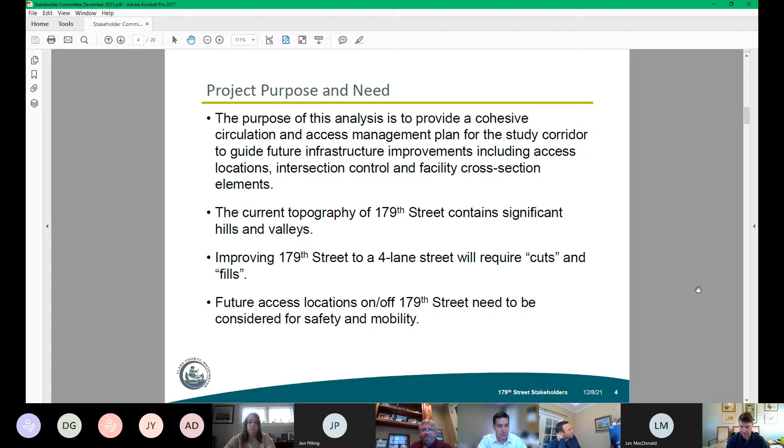So the intent of having a stakeholder committee is really to give us as county staff and consultants guidance, insight, and considerations for promoting that safety and mobility. We also want a team that provides guidance and insight with a lens of what's needed on the infrastructure side of things, both from the public street perspective as well as private development perspective, so that we can all flourish and move forward together.

So we are guided by several different goals and policies within the comprehensive plan. The first and foremost goal is to optimize and preserve the investment in the transportation system. As I mentioned previously, there's approximately $66.5 million of investment going into the Clark County system. That's exclusive from the interchange reconstruction project, which is approximately $50 million coming in from the state in reconstructing the interchange at I-5 and 179th Street. If you do the math, we're looking at approximately $110 million worth of investment, and that's just currently. I'm sure there will be more investment in the street system in the future as we improve this entire corridor from 11th Avenue to 50th Avenue.

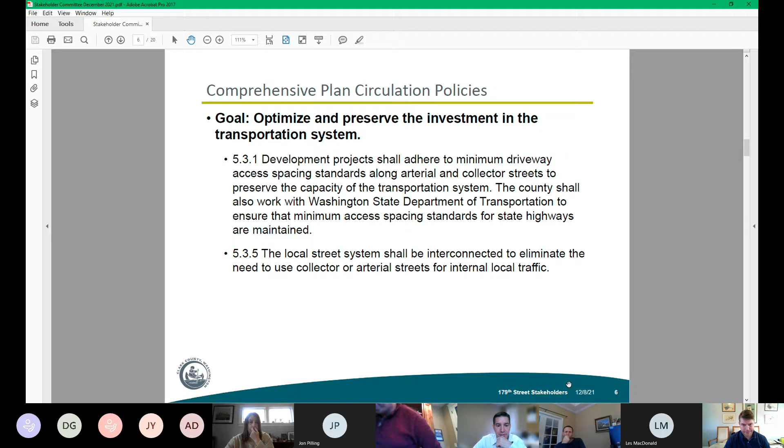We also have a goal in the comprehensive plan to ensure mobility throughout the transportation system. Again, making sure that our investment in our transportation system is as efficient as possible. Not only can we move vehicles and trucks, but we can also move both pedestrians and bikes efficiently as well. We want to make sure that all modes of transportation are accounted for in our long-range transportation plans and within this corridor specifically, so that can accommodate safe travel for all.

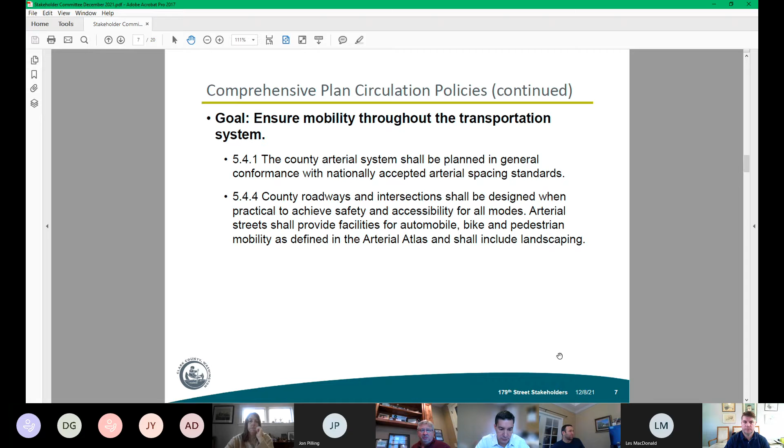So our planning study is the Vancouver urban growth area of the 179th Street corridor. That's on the west end. The bookend is Northwest 11th Avenue, moving eastward across the interchange, and ending at Northeast 50th Avenue.

There are certain corridors or certain sections of the corridor where they interact with the interstate, and those points of intersection are coordinated with WSDOT as both our team and the WSDOT team move forward with the interchange reconstruction design.

I should mention, feel free to interrupt me at any time. I'm looking at my presentation, so if you raise your hands, I can't see you, so just go ahead and speak out if you need clarification.

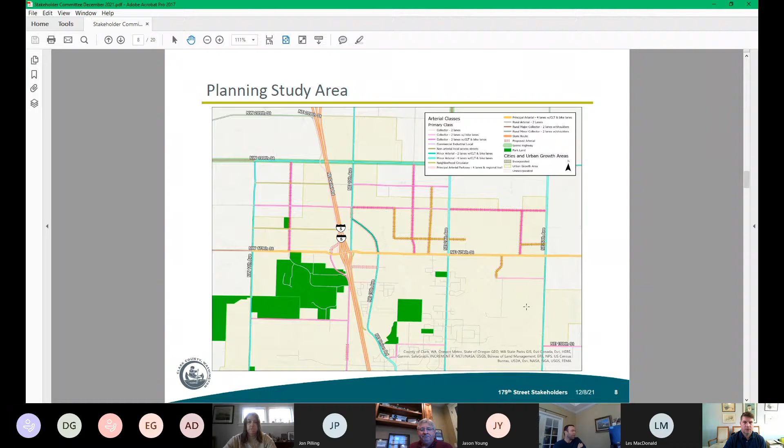So throughout our conversations together, we've largely been focusing in on the interactive project website. This project website, I'll share it here soon.

It has several different layers. We've all kind of worked through this. I hope you've interacted with this independent from the stakeholder committee and have played with it on your own. But there are several different layers added to this map that show both environmental constraints as well as topographic issues. One of the important things that we put in here were regarding the future grade of 179th Street and how that grade interacts with the existing terrain. I'll go into details about that further in the presentation.

Along with future developments that have some line work in here, and both the intersection control type is detailed.

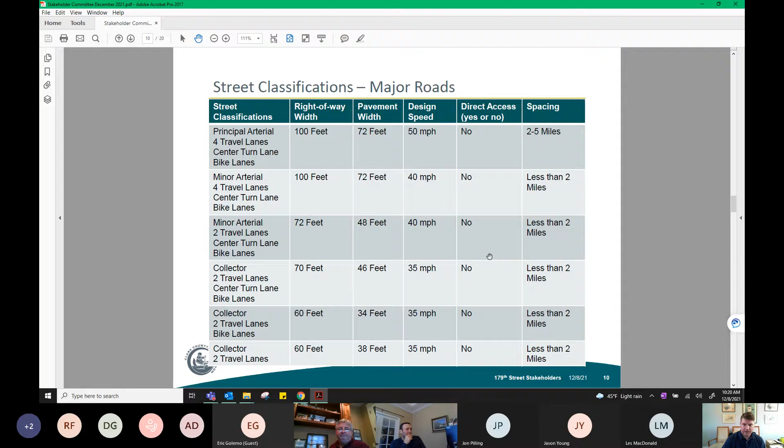However, our local roads serve to connect our arterials and collectors to both storefronts as well as residences and driveways. We have several different types of those. We have commercial industrial roads, 3 or 4 separate types that really serve as local roads inside commercial and industrial zoning districts.

We have neighborhood circulators that are wider than local roads that connect the local roads to the collectors. And then we have local road access. These serve as the street front for many properties and connect folks from their garage or driveway to the larger street network.

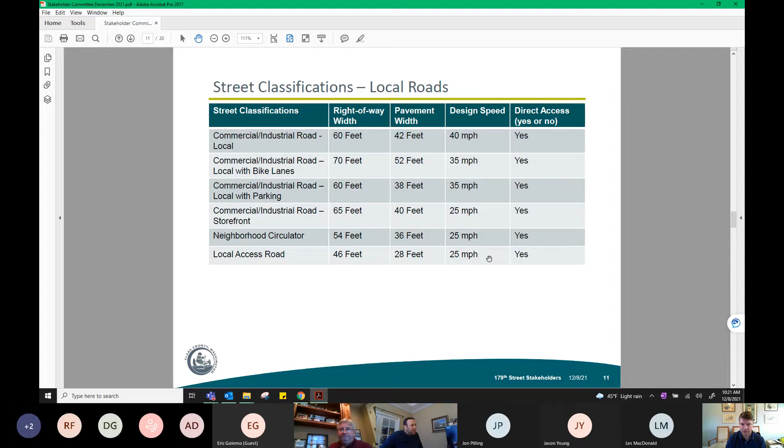Okay, the next series of maps are new maps for you. They expand on our previous discussions regarding the ultimate design and topography of the road with the existing terrain.

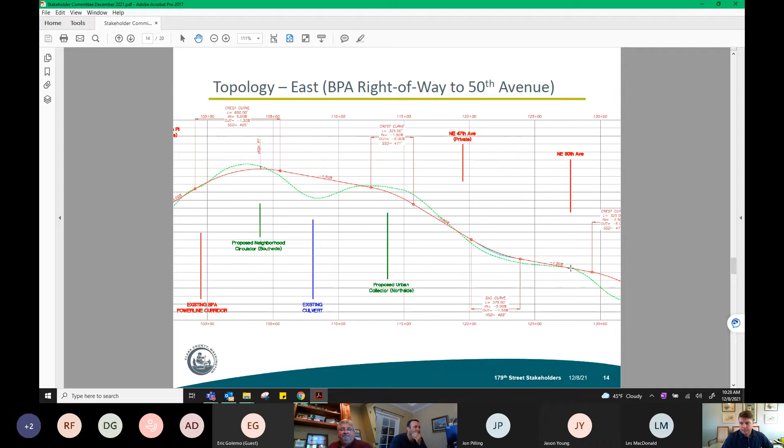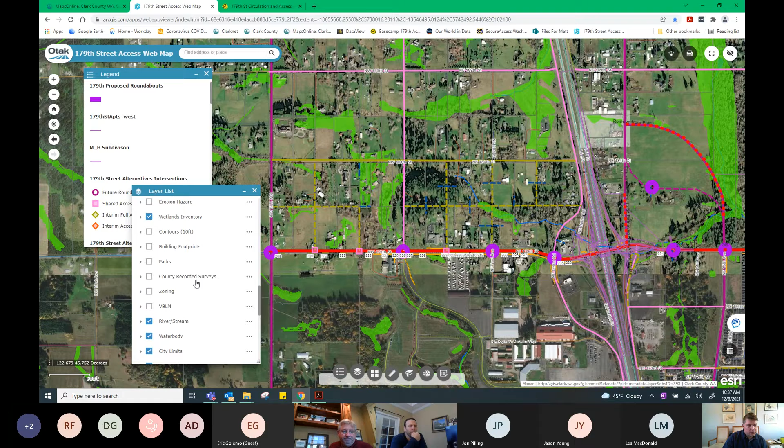So that's the need for the roundabout at that location. And then Delfel Road, as part of the interchange reconstruction, is going to be realigned to go behind the chevron and connect with the existing Delfel Road to the south. That realignment is necessary to separate the traffic at the future ramps, roundabout ramps, and Delfel Road—so it's a safety issue why Delfel Road is being realigned. While it is a county project, it's very closely associated and coordinated with the interchange reconstruction project.

Any questions on this section of Northwest 179th Street before I move forward?

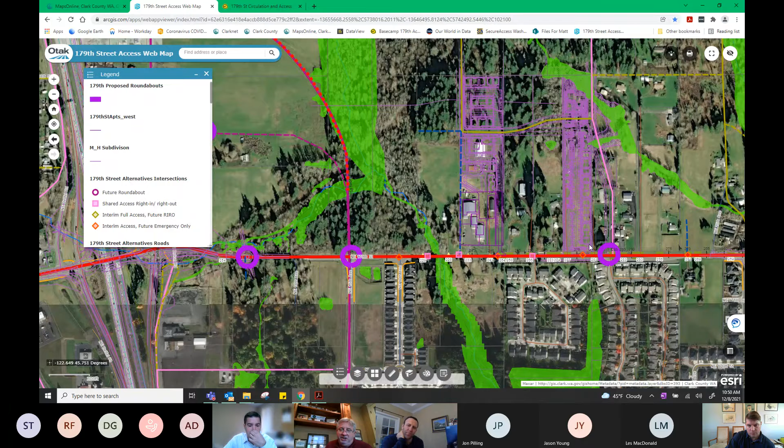Just for the west one, not for the east one. Matt, I think they're correct, because when we went through the site plan approvals, that's what we understood as well. So those would be maintained in their current state—there is no project on 179th at this point, but they'd be maintained with the approved full access until 183rd Street is connected over, and then 22nd Avenue is extended down to 179th. So those would be understood by the development approval to be full access until those other conditions occur.

That's right. It also states that we have to allow full access for the one flag lot and the smaller parcel. So those two lots to the east need to have access through that interim access intersection.

So the difference between the two shades of diamond is one is future emergency only, one is future right in, right out. So does that need to be changed? They are future emergency only. Okay, but one's full access and one's not, or one is, or are they both full access?

It doesn't—the orange one doesn't depict full or half, it just says interim. And that was actually left somewhat ambiguous on purpose, because that's one where we're deferring to the development approval conditions. In both of those cases, I believe the conditions do say full access to 179th until the alternative circulation is provided, and then it becomes emergency access only.

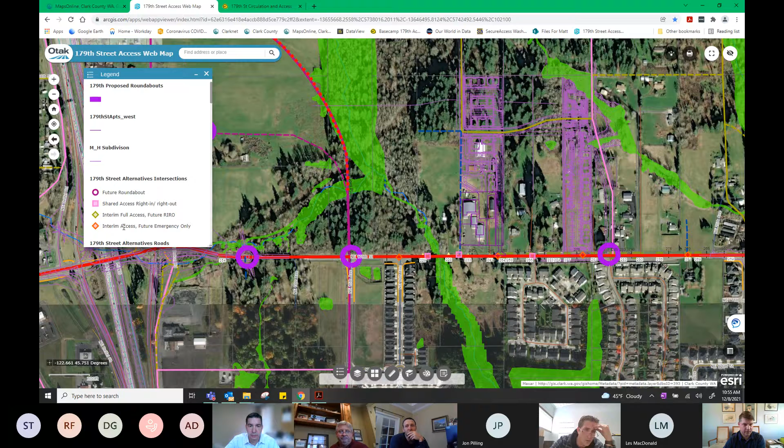So we can add the word full into this. I don't think it will change much—the type can change from interim access to interim full access. Yeah, maybe that one becomes the yellow diamond. But if you change it to the yellow diamond, then the future is right in, right out only, and that's not approved—it's emergency use only. So it's really just adding the word full to that symbol type.

Matt, I might suggest an asterisk. Maybe where we have special conditions of development approval—Woodbrook might be the same thing—we might want to note and reference those specific development approvals and conditions, maybe by number or permit number, so that it can be looked up in the future.

Because most of these interim accesses, after 179th is built, they're going to have a median that does not allow any more access. But at least one that I know of should preserve full access after 179th is built. It should be treated differently than the rest of these that are labeled as interim access, in my opinion.

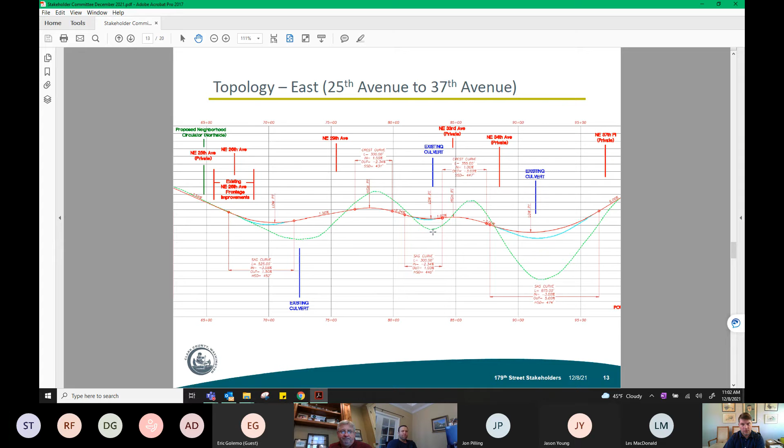Okay, moving back to this segment here, we evaluated—Eric brought up the idea of shifting the future collector further between the two properties. When we looked at that from a topographic perspective, going to this map, approximately the location where that future collector would go is right here. So we decided against relocating that future collector, and put it instead at the safest location for sight distance purposes, which would be right across from the condo complex.

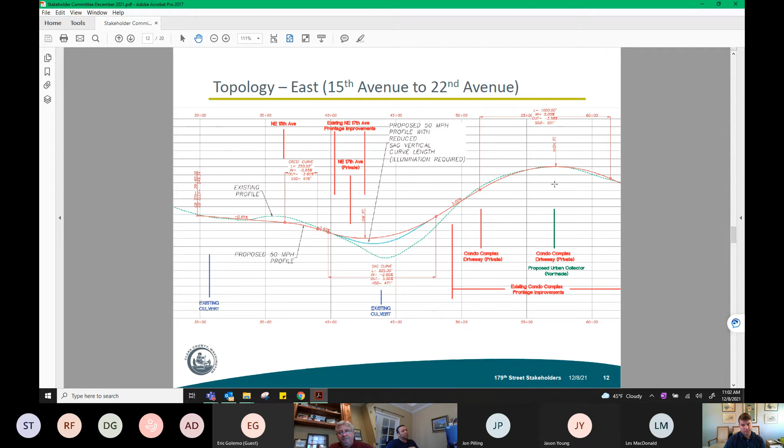We're also looking at, instead of crossing the wetlands to the east of the future collector, realigning that neighborhood circulator so that it's along the property lines and avoids those wetlands, aligning that future neighborhood circulator with the property lines at a right in, right out access.

Again, these right in, right out accesses will rely on the two roundabouts to the east and the west for their left turns.

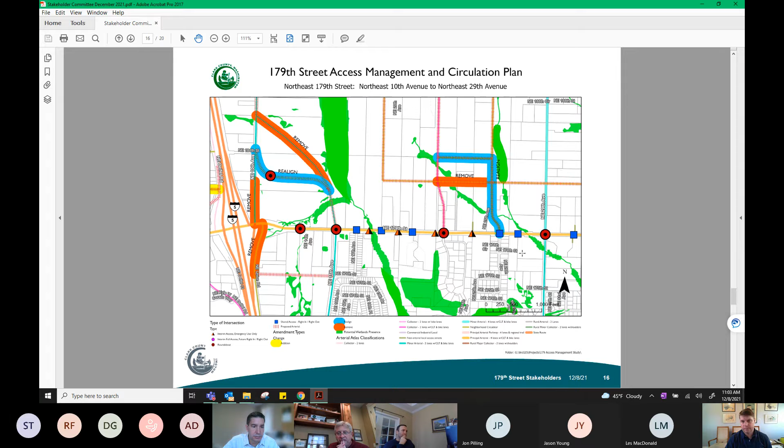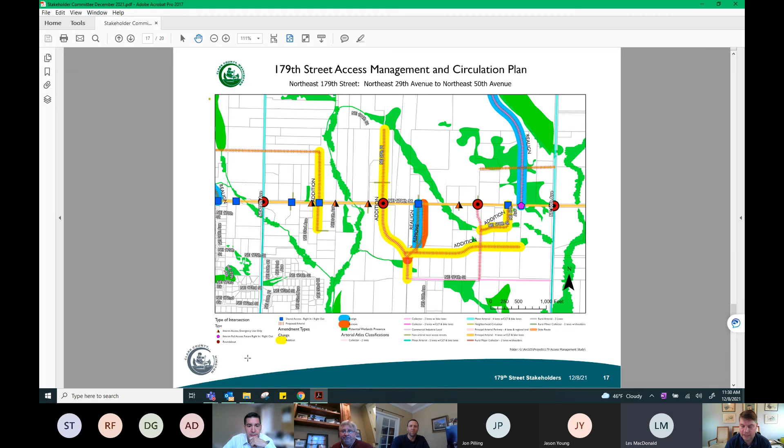Okay, so there's been a motion. It's been seconded. Are there any objections? All right, so with that said, I'll go down the line and do a roll call since it's all virtual.

Eric Golemo. Aye. David Gilroy. Did he step out? Gary Vance. Aye. Jason Young. Aye. Jon Pilling. He's no longer there. Les MacDonald. Aye. And Scott Taylor. Aye. Thank you, all right, thank you all.

Thank you for your time today. I really appreciate it, I know your time's valuable. I've said this previously, but I want to reiterate it. You're helping make this community better, so I really appreciate it, and I really appreciate the coordination that we have. We'll make sure that footnote is clear as possible, and that it's shown for the approval bodies moving forward. So thank you all. Thank you. Thank you, Matt.